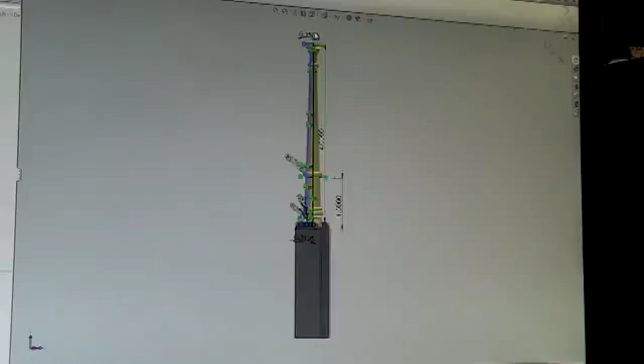Our design process started out with a type of CAD, or computer-aided drawing software, called SolidWorks. SolidWorks allows us to take the idea from a rough sketch to 3D models.

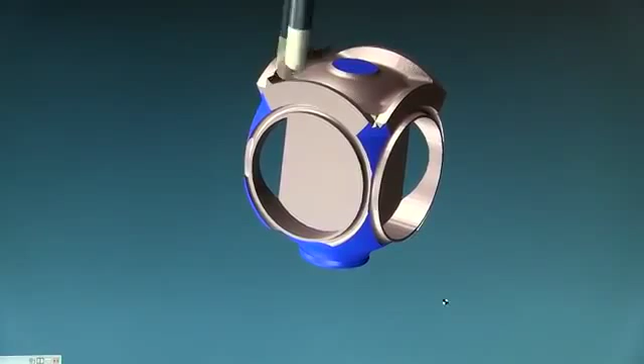The next step we used was a computer-aided manufacturing software called GibbsCAM. GibbsCAM allows us to define our tools and simulate how the part will run in the machine without damaging the machine or tools. Our project started out focused on the clock head.

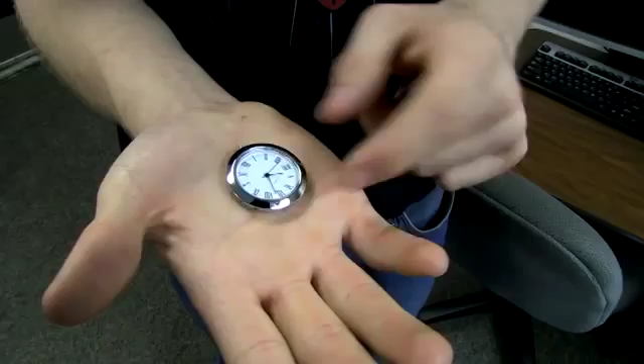We started here based upon available clock faces. Once we determined the size of the clock face, we could scale the other parts accordingly.

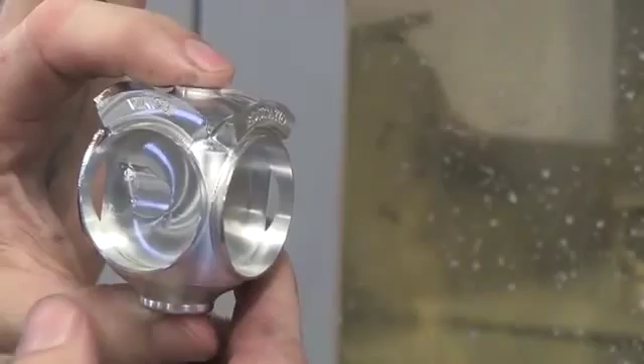With the clock head being the focal point, it was important to get the correct curvature and shape. The GibbsCAM software allowed us to make sure radius and angles blended properly and that parts could be machined as designed. Just because you can draw it doesn't mean it can be machined.

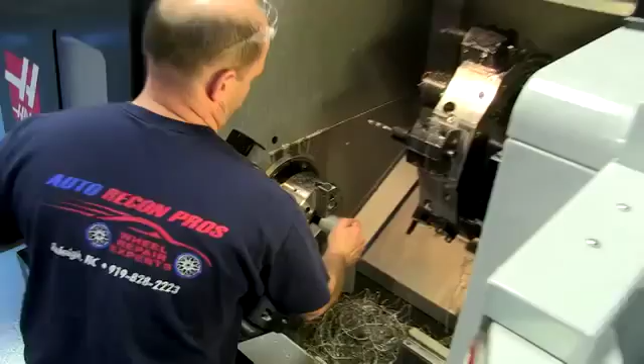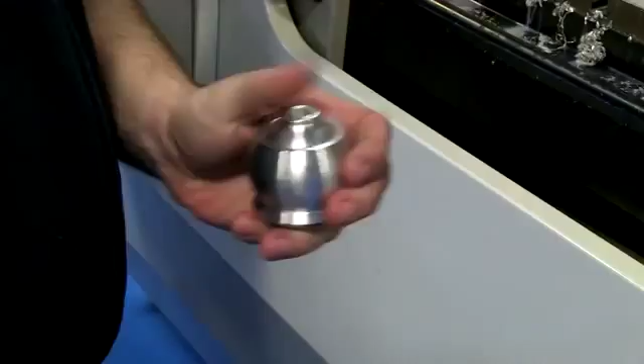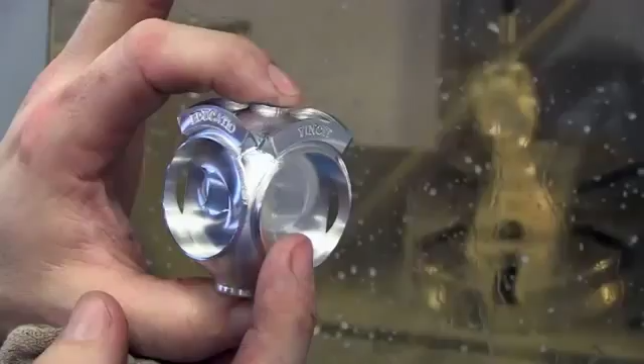We incorporate the 5-axis capability of the Haas VF3 CNC mill. We built a fixture to work off the turntable and created a standoff for the clock head blank. This allowed all the milling and intricate detail to be done in one setup. The 5-axis permits the proper movement to achieve the continuous flow of radiuses and blending of the different milling processes.

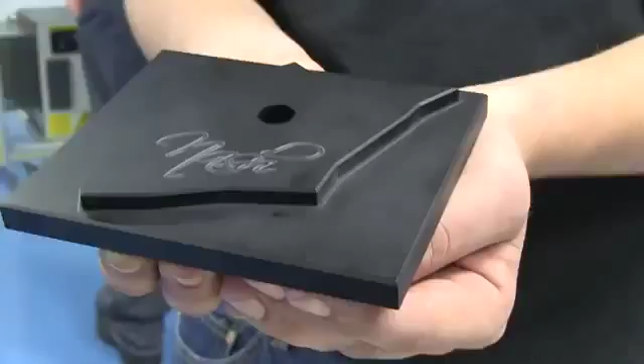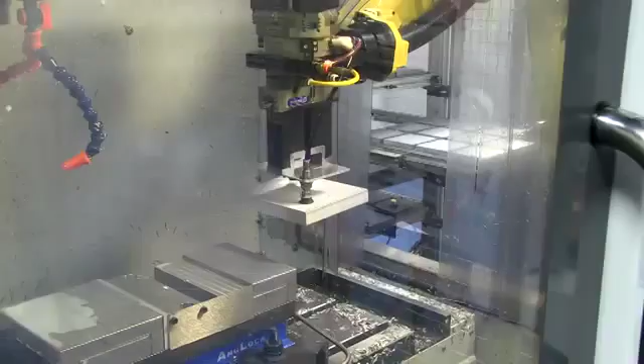Whereas the head has a lot of intricate detail, the base had some very obvious detail. The base was one of the two project parts that incorporated the use of our new robotics cell. This was done in conjunction with the ATR 281 robotics class. Both classes learned what works for one doesn't always work for the other. The important component is the use of the robot allows for unmanned and unsupervised continuous running of parts.

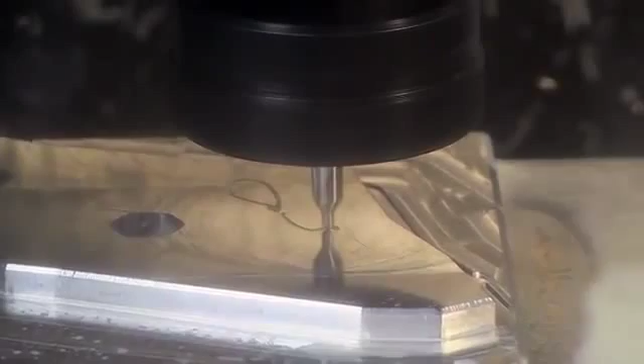The first detail on the base is the raised outline of Nash County. This consisted of importing a drawing and converting it to a raised component of the base. The other design feature was the engraving of the Nash Community College logo. This and the Nash County outline are the two main features of the base.

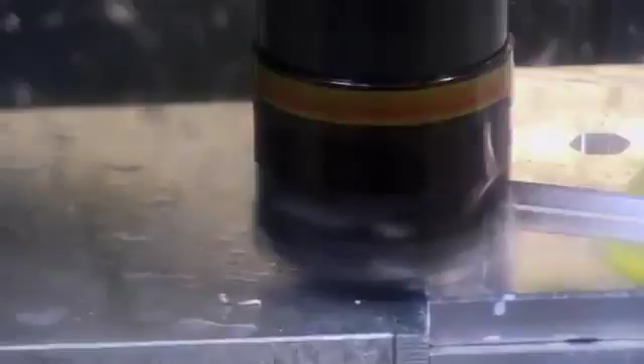The integration between robot and computer numerical control machine proved to be a valuable learning experience, one that will be valuable to our students as they move into industry jobs.

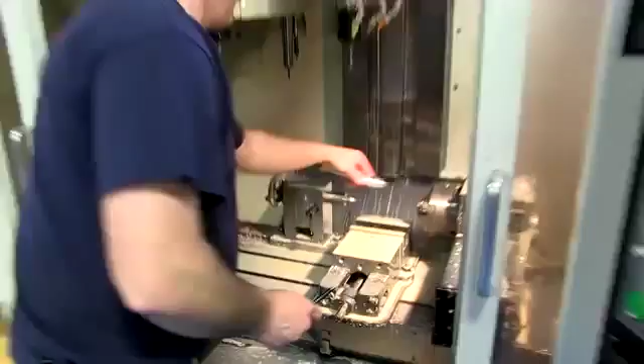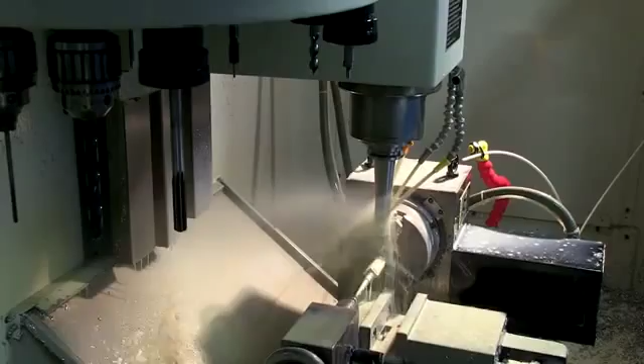The post, while small, carries a lot of detail. The detail goes from the taper on the post to the square on the base. There are intricate features on the square base matching details on the actual clock. The tapered post has a fluted detail. This feature requires working in several different planes and angles of rotation.

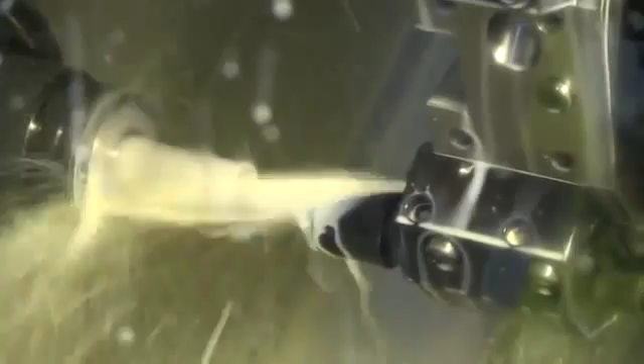Although it's the smallest part on the clock, the finial could possibly be one of the more important parts. With its visible location atop the clock, it's one of the first parts seen on the finished product. It was important to be spot on in our execution of the finial.

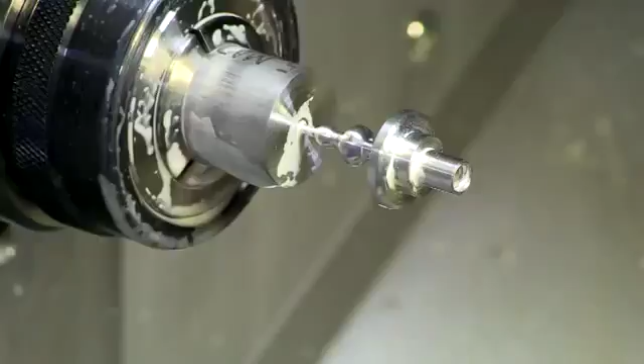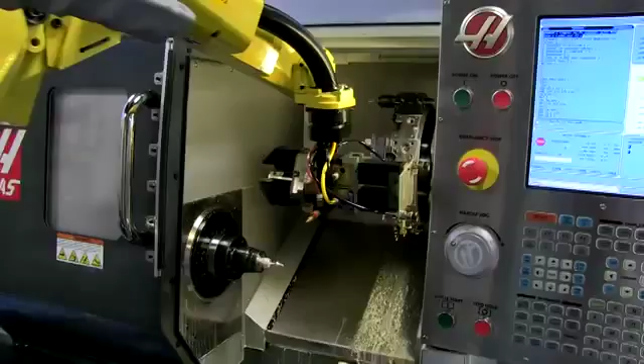The finial is also manufactured in the robotic cell. The part is machined to leave the finial attached to the stock and allow the robot to break it off and deposit it in a bin.

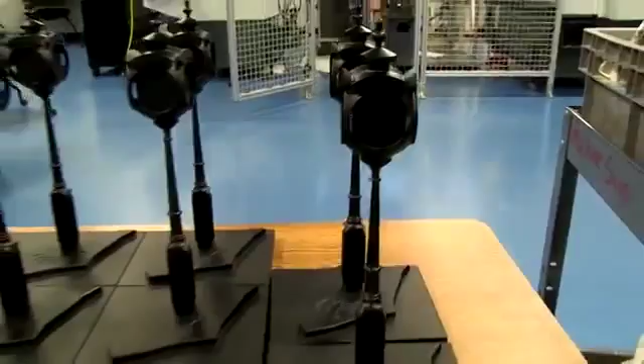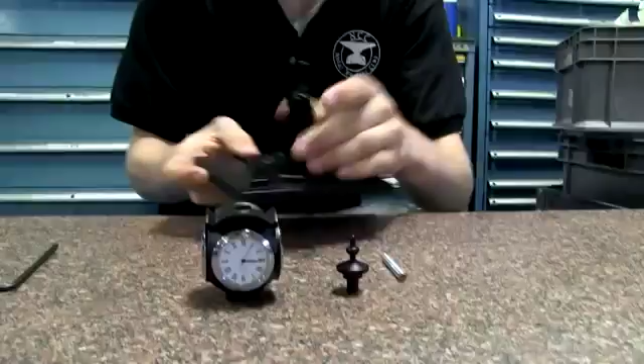Once all the parts were machined and checked for fit and finish, they were sent to a local company for a finishing process called anodization. To anodize is to coat a metallic surface electrolytically with a protective or decorative oxide, and in our case, we chose black. Once back from anodization, the assembly began.

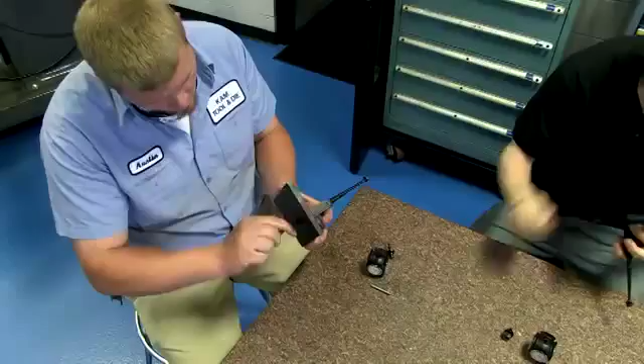The manufacturing and execution of our design showed its true measure: a completed assembly. 150 clocks seemed quite the daunting task. With more than 2 hours of runtime in each completed clock and countless hours of preparation, we reached our goal in the allotted time of 1 semester.

With a visit from U.S. Senator Kay Hagan coinciding with the completion of our project, our class was able to present her with our first assembled clock, a great way to introduce our clock to the world. We'll see you on our next project here at Nash Community College.